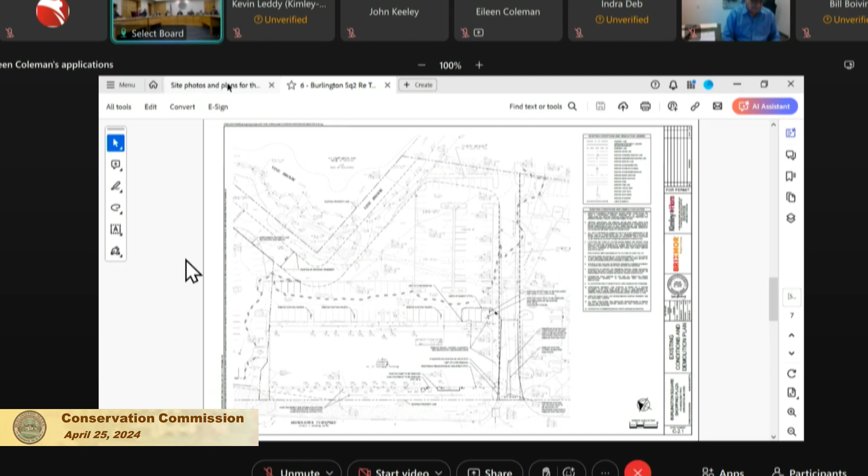Okay, John or Eileen, any comments, please? Okay, so this work is in the riverfront of the stream, the Vine Brook tributary that runs through the site. Right. So it's in the outer riparian. It's a fairly minor project, and it'll result in a slight decrease in impervious area in the riverfront area. So really, I have no concerns about this project as a request for determination.

Now, it's also been filed with the planning board as a minor engineering change. And I've talked to staff in the planning department, and they think they're going to hold off and issue a decision on the minor engineering change for this work until the parking lot work gets resolved. The parking lot is the subject of the notice of intent, which is also on the agenda tonight, but has been continued, because the parking is so critical to the tenants that this work is being done for.

The work being done under this determination is under a minor engineering change with the planning board. So they're going to hold off. They're probably not going to issue a minor engineering change. I don't have any concerns about issuing a negative determination at this point. But if anything changes with the planning board, it would require them to come back and file another request for determination if the plan changes as a result of any planning board changes.

Okay. All right, let's see, on the right, Ed, anything on this? Oh, nothing to add. I would concur with John on that one. All right, Sarah, anything, please? Could you explain how the reduction in impervious happens? I mean, I'm familiar with the site. I know Tower, old PR salon and all those shops along there. What's going to be changing? Sure. So the islands are currently impervious, so we're going to add landscaping to them. Okay. So that's how it's going to decrease the imperviousness. Okay.

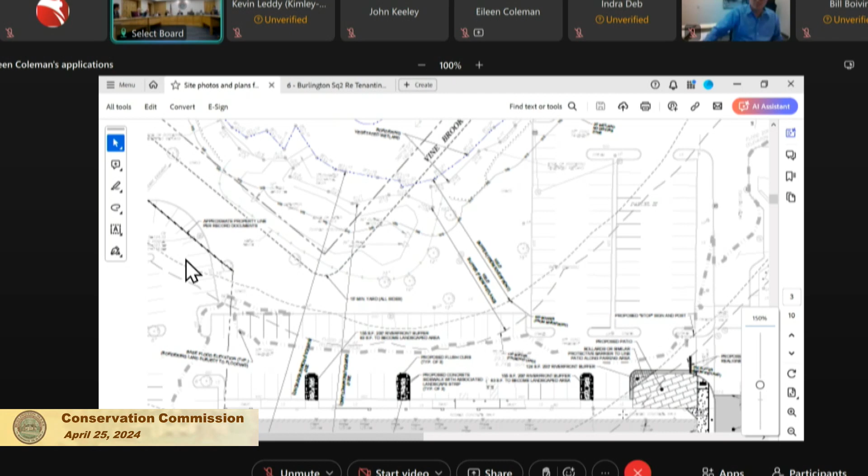And this does not concern anything regarding the flooded parking lot? No, that's a separate project. That's all I've got. Okay, on the left, Rob, anything on this? No. Okay, Indra, anything further? So will this enhancement impact anything when they come back with that parking lot elevations, the other one? Nothing. This shouldn't have any effect on that filing, no. All right, thank you. Not as far as the Conservation Commission goes.

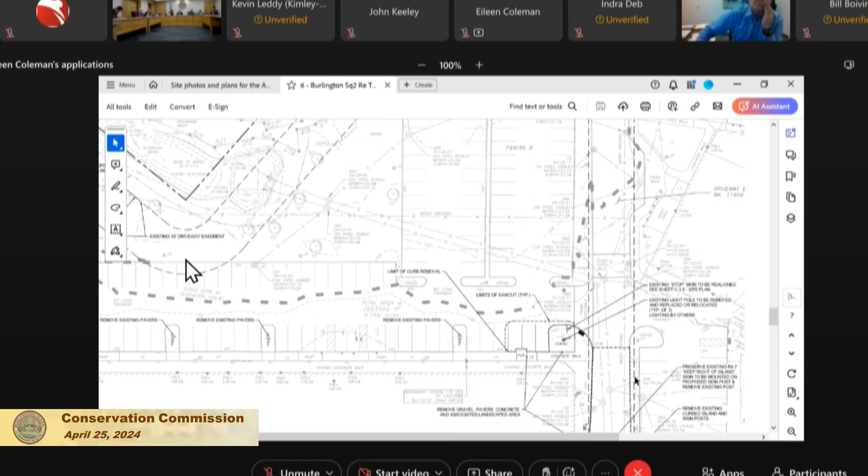Bill, anything? Yeah, there's one item on the drawing that I don't understand. It says 239 feet of a 15-foot tall screening wall. See the detail by the architect. I couldn't find the detail anywhere, and I don't know, is that a concrete wall, or what are we talking about there? Bottom of the drawing, those are the squares that are connected by a line. Down here? Yep. Not entirely sure. Pointing to this line to squares. 15? I mean, is that something substantial, or is that just a fence, or what is it?

May I, this is Marc Newman with Brixmor Property Group. Yes. How's everybody doing tonight? Good, how are you doing? Good, thank you. Kevin Leddy is on the phone as well, he's our engineer.

A couple of items, first of all, that screening wall, and I'll have Kevin describe it in a little more detail, is a screening wall that we're putting up along Middlesex Turnpike as part of what I would call a cosmetic enhancement to the property. It's part of our overall renovation of the property to make it look more appealing from Middlesex Turnpike. Along Middlesex Turnpike, the building has a lot of old HVAC units and other items along the road that are, in our opinion and many of the retailers we're working with, unattractive. This is basically designed to be a screening element.

It's already been granted a variance by the Zoning Board of Appeals, and it's going to have some signage attached to it as well. And it's obviously subject to the review of the planning board. That's pretty much the short description. What is it made out of? Yeah, is this a wall or is it a cyclone fence with the green webbing? Kevin, do you have any of the detail on the material that it's made from? I couldn't find an architect detail that describes it anyway. Oh, Kevin sounds like he might be.

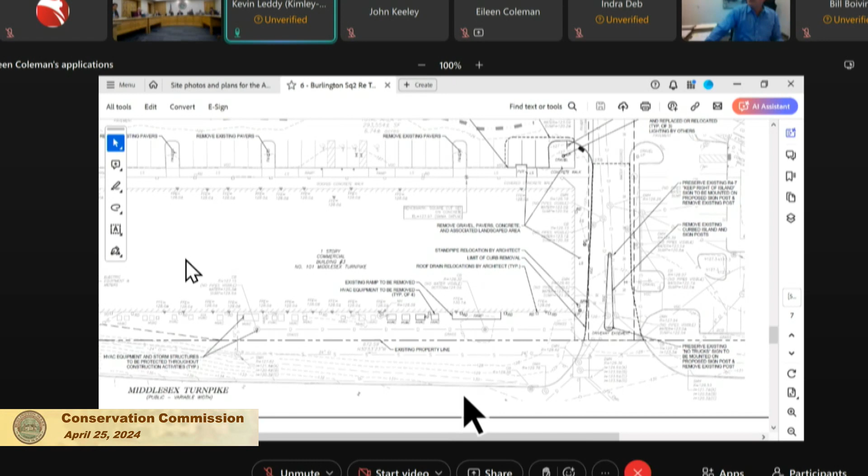This is Kevin Leddy with Kimley-Horn, one of the civil engineers with the applicant. The screen wall is located approximately 2 feet off the property line. We have gone before the Zoning Board of Appeals and received a variance to place it there. The screen wall is a mixture of living vegetation, sort of a mesh screen with some shiplap wood. I'm trying to pull up the detail on my end to share with the board. I think I have a fairly recent rendering I can possibly share. Yes, please. We have no concept.

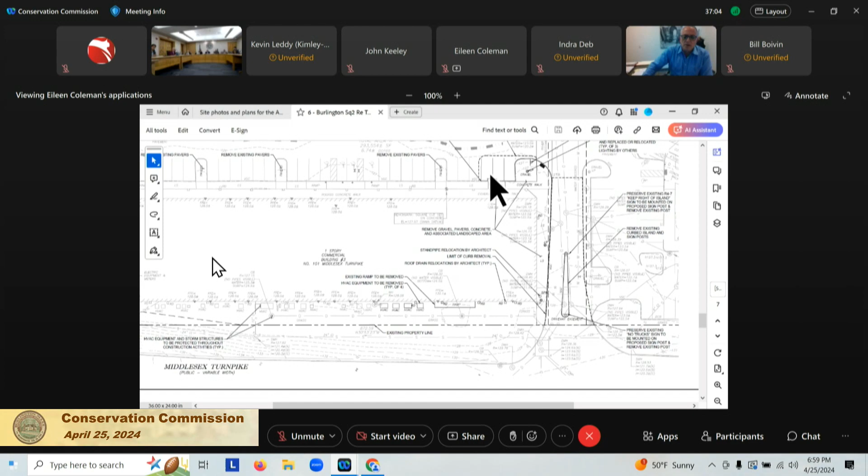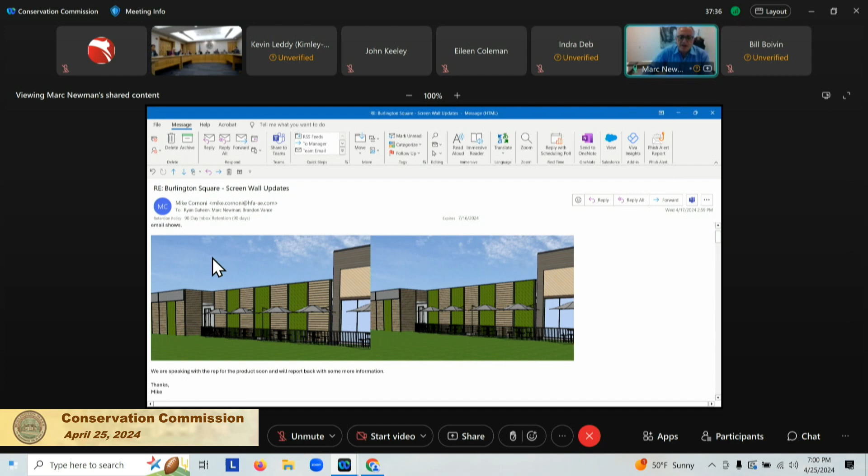Eileen, when you put up your window, it seems very small. Can you enlarge the window? I can't enlarge the window. I've tried to zoom in, but it's a window inside of a window, a feature of the big screen there. I'll zoom in as much as I can, but I've stopped sharing so that they can share. No, I understand. I didn't want to forget to ask. Just tell me to make it bigger whenever you want. Bear with me. I'm going to try to find something a little bit better. Hold on one second. Picture of it here, Larry. No, he just took it away. Gotta be quick, apparently. No, I'm gonna find a better version.

Well, it's well outside the 100-foot buffer zone for the riverfront area, so I am not sure we have to spend a lot of time on it. I was curious how substantial a construction it was. Oh, I understand the reason. Digging and all that. Yeah, I definitely understand the reason for the question. No, as soon as he shows us what it is, we may be satisfied.

This is sort of an earlier version, and I want to find one with more detail, but I feel like you would like to see this quickly. Hold on one second. I would think a natural vegetative screen would be very nice. Do you see this? What are we looking at? Yeah, that looks like a thing. This is essentially what the screen wall would look like. This is an earlier rendering. I think it's even nicer looking since this. We've improved the color. It doesn't have as many signs as you see here.

Why wouldn't you plant arborvitaes? They grow 15 to 20 feet, and it would screen all that stuff. Oh, I guess you want the signage up top. We also wanted to protect a sidewalk that we're creating that provides access to the new restaurant that we're proposing for this space, to where they would have their dumpsters, and it's really also to substitute out the signage that's on the building right now, just swapping out the signage along the building for this signage feature. It's going to be very sharp looking.

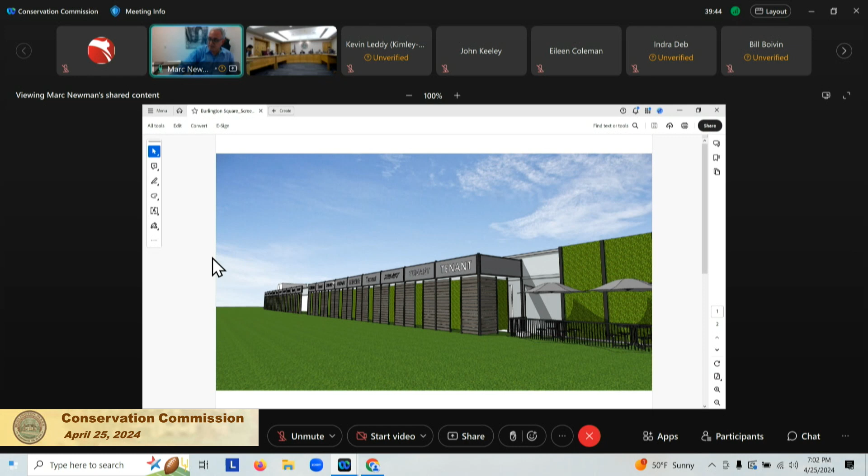And the sidewalk is inside this fence. Yes. Okay. Got it. Okay, well, we need to move along. Thank you for answering that question. If there's nothing further, I have one question. You have a patio that you're creating, is that true? Correct. Is there any reason why that could not be made out of pervious pavers of sorts? It's not a high-use area.

We can look into converting the material into porous pavers. Our initial concern with that is due to the high groundwater table in the vicinity, and hence the other project with the flood mitigation. We wouldn't want to commit to porous pavers and then have to backtrack that work should it be determined to be unfeasible with the actual conditions there. So why don't we just leave it that you have agreed to evaluate it? How's that? Yes, agree. Okay.

All right, if there's nothing further, we have a draft decision. So just logistically, I'd like to ask the applicant, do you want a negative determination of applicability this evening, or did you want to wait and see how you make out with the planning board? Go ahead, I'm sorry. Well, I think it's kind of a chicken and egg. I think they were waiting to get clearance from you that everything was okay. So they're actually waiting on the notice of intent for the parking lot, not so much for this. Yeah, we're fine moving forward with this.

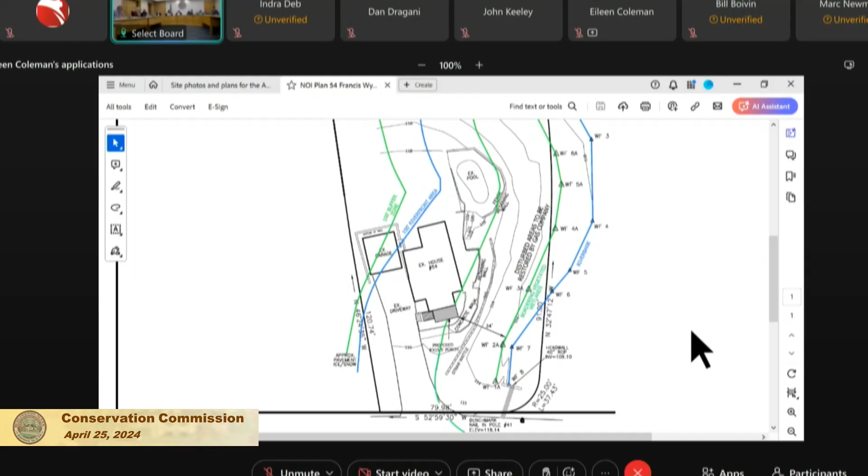It didn't actually go through us for a permit at that time because it was going to be in exactly the same footprint. But when it became apparent that they wanted to add a little bit to the footprint, that being the porch, we told them that they needed to do an application. Given the small scope of the build, we said it could be an RDA, even though it's actually quite close to the river. So the wetlands have been delineated out there a couple of times. We all went out and saw it 2 weeks ago.

There's wetland flags and stream flags, and I think that we're not in full agreement as to the extent of the wetland flagging. I think we also have a couple of questions about the stockpiling in the way back, about what plans there might be for those piles of soil. And we also understand that there was some disturbance pretty close to the wetland that was unfortunate, but isn't really a matter under this particular request for determination of applicability.

So I don't have an issue with the porch going where it is. I think we just have the question about the stockpiling, and we do have issues with the delineation. Did you want to add something? Yes, so it's an NOI, not an RDA. Sorry, it is an NOI. And it does require a waiver because it's in the 40-foot no-build.

But when the previous owner was looking to subdivide, I did walk the site with another wetland consultant, I won't name any names, but we determined that the wetland extended well into the lot, and that's what basically squashed the potential subdivision of this lot. Quite a bit of their lawn area is hydric soils, and they're currently driving through it. It's kind of torn up. And that's definitely a wetland area that they're driving through.

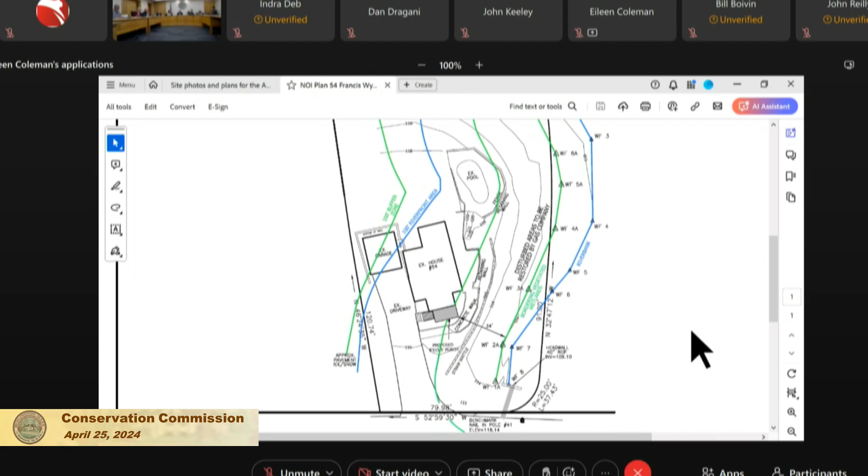Okay. That's about it. All right, so what essentially we have is a relatively small proposed project, but there are issues on the site. Right. Okay. Oh, and so we didn't mention this. So the newspaper screwed up. This should have been on the last agenda. The newspaper ad never ran. We sent them the ad and they didn't run it. So typically we extend hearings for two nights just to try to accommodate the applicant, because it's not his fault that the newspaper missed the ad, and we're actually opening the hearing beyond the 21-day period that we're supposed to statutorily open it in. I'd recommend that the commission try to wrap this up and issue an order in one night. Tonight. Right. Okay, so Ed, you want to say anything further on this one?

Just to follow what we all did see, in that it's clearly into wetland area, is there an intent to put any kind of a drive to get behind everything there? Because there isn't any other way to get back there. I mean, what is the reason with stockpiling that is back there? How do you get to it if we're showing that it's wetland that'd be ripped up every time?

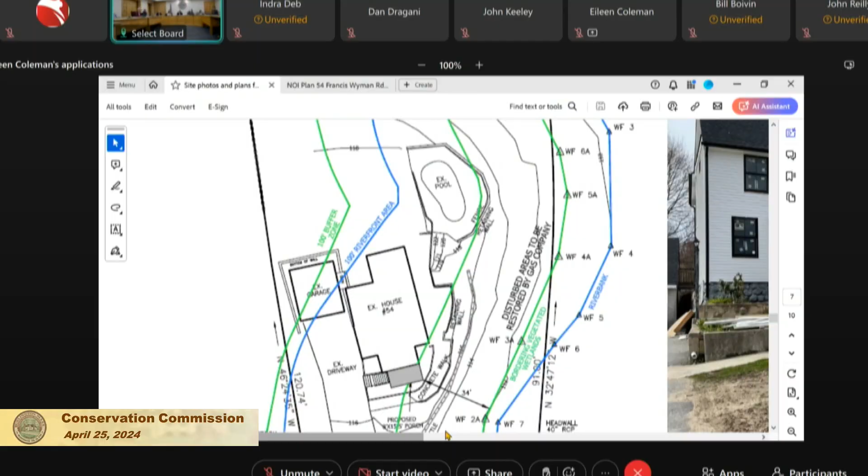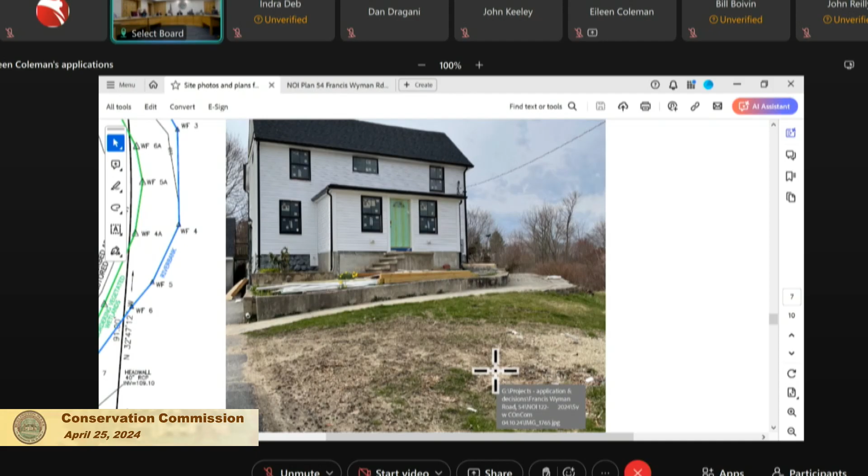So no, there's no intent to put anything on that side of the house. As far as the stockpiling goes, we didn't stockpile any of that dirt. It looks like it's been there a while. So we don't have any plans for that. We also didn't plan to get rid of it in any way. Certainly open to comments on that, but no, there are no plans currently for anything on that side of the house. Okay. Sarah? I don't have anything to add. All right. Rob, anything? No. Okay, Indra, please? Nothing. Nope.

Okay, Bill? I don't see any issue in issuing a variance for the small inclusion into what is now defined as the 40-foot no-build. And to echo what Ed said, it seems to me like there's going to be a strong motivation to have access to your barn out the back and stuff like that. And I don't know how you're going to do it. If that is truly wetland and a 20-foot do not disturb attached to it, it really closes that off completely. So I don't know if you have any comments on what your intentions are about the barn and the shed that's back there, and how you might deal, or even getting back there to mow the lawn.

I mean, here's the situation. I see the same thing, Bill. Yeah. Every time you drive back there, you're driving through things that are legitimately characterized as a wetland, even though it doesn't look that way, because of the nature of the soils, which is how it is defined. So I'm mindful of the fact that this is a very small project, and that mandating an expensive restoration and moving of the wetlands someplace else, but I'm wondering if we can get some kind of commitment from you, or you have any ideas on how to do something different, even if it's over a little longer term, to try to deal with the fact that you have an area that's wetlands.

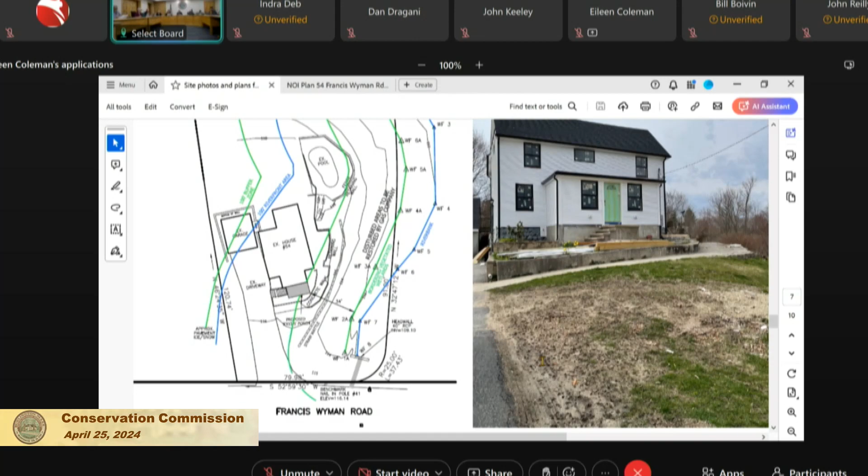John, what really needs to happen on something like this, ideally, is you prepare an area in the back that would compensate for that area that he wants to go through, and put a wetland seedling mix back there, and try to create a wetland back there? No? The project is an 8x15 farmer's porch. He's bought a house, the area's been treated as lawn for probably decades. He's not doing a major project. I would not recommend making him fill wetlands and replicate as part of a farmer's porch project. Because the project's too de minimis. Yeah, it's a very small project.

Do you have a problem with him driving his lawnmower over it after it's been leveled out again? It's been mowed historically. He's not just driving over it, he's mowing it. That's grass, and it has been grass for a long time. I just think the scale of the project, if it were a brand-new house, yeah, you generally get people to give back some of the 20-foot no disturb when somebody's doing a tear down, but it's a small project.

I hear you. And if we had been involved in this from the beginning, well, he had to build it in the same footprint. That's right. If this was total new construction, we would have asked for some kind of a design that would allow access to the back of it. Okay. Yeah, you're stuck with just the porch. All right. That's John's recommendation. Is everyone okay with that? Work with them when you're doing your plantings. Okay. Sarah? All right. So it looks like we've come to an agreement to move on.

He'll work with staff when he has to do his plantings, in a place further from where he drives his mower. I don't think he'd mind losing some of the lawn that's really wetland. He can let that go if it's moving 6 or 7 feet. Is there a gas line easement there, though? There's not, it's not a main, right? No, but there's the sewer main in the back that runs through the property. There's a sewer main that runs in the back. And that has an easement, yeah.

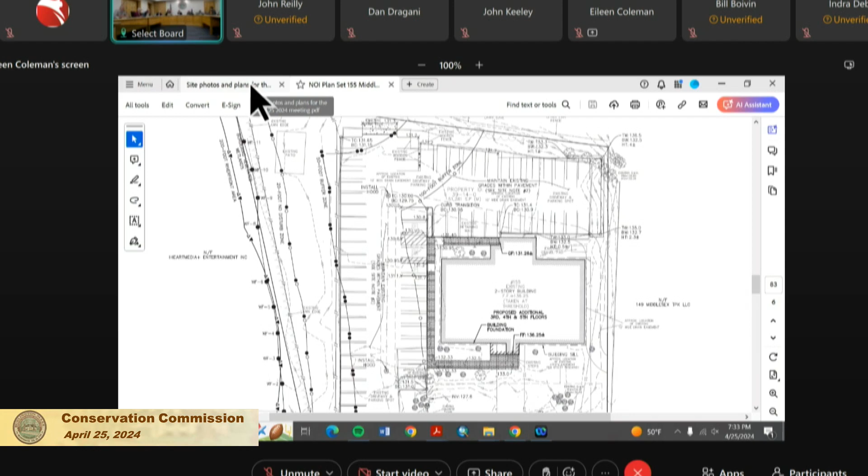I understand the commission went to the site. They had the opportunity to visit the site the other night, last night I think it was. And I think that's it. We'd be happy to go over any details. There's some photographs that we included in the notice of intent application. I'm sure Eileen probably has some queued up as well. But happy to turn it back over to the commission with any questions they may have.

All right, good. Thank you for that presentation. All right, so John or Eileen, do you want to give us a rundown, please? So as far as the resource area delineation goes, it seems fine. As Mr. Kirby said, the resource areas are off-site. They're not really accessible on private property and with an out-of-state owner, so it's pretty difficult to get in there. But the estimation of the BVW, just off the property line, pretty much. Seems right, seems fine. So my concerns are mostly about the stormwater on the site.

I have asked for some information on a few things. For number one, there's a big discrepancy on the FEMA floodplain maps and the elevations that are shown on this site plan. FEMA maps show quite a bit of some of the parking lot, and certainly a lot of that grassed area is 100-year floodplain, but the topo on the site plan doesn't match up. So just need some clarification on that, maybe some information from the land surveyor on what they used for a benchmark, and just verify that those elevations are actually correct. I don't think it would impact the project much, but I'd like to get that straightened out.

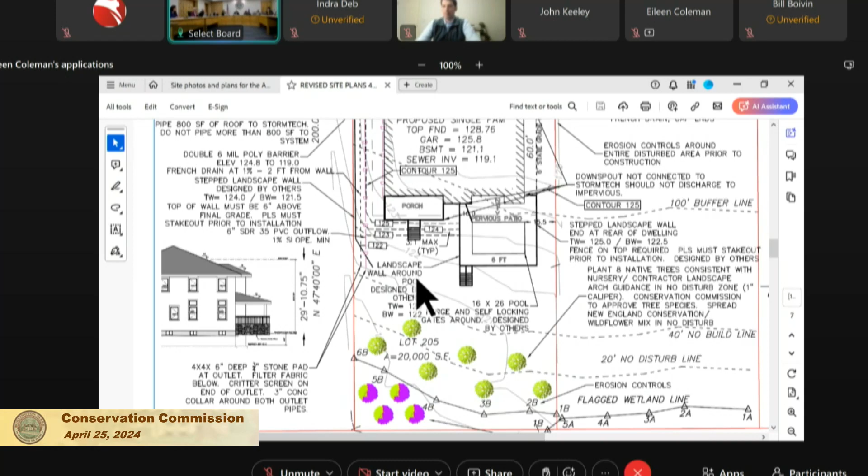Okay, so now that you've given a summary, I think what we should do is what we do with fairly complex projects: we list the issues, and then we'll get some responses back eventually on the process. All right, so with all that, John or Eileen, would one of you like to start a conversation about what concerns you may have?

Well, I will begin because I'm the one who was initially dealing with Rakesh and with Mr. Giuliani, and then with Maureen and with the neighbors initially, although I think everybody has been by now. So I just wanted to share a few pictures to add to what Larry said. These were the first ones we took when we went out and we saw that there had been cutting. There is a note from DEP in their portal saying that there are structures visible on the aerial. That's these structures here. There were I think three sheds in the area.

Were they gone when you first went out there some months ago? I believe they were gone. I think they were because they're not here in this picture. So DEP was concerned that these sheds weren't here, but they were definitely gone before the trees came down, as far as I know. Just giving you the history.

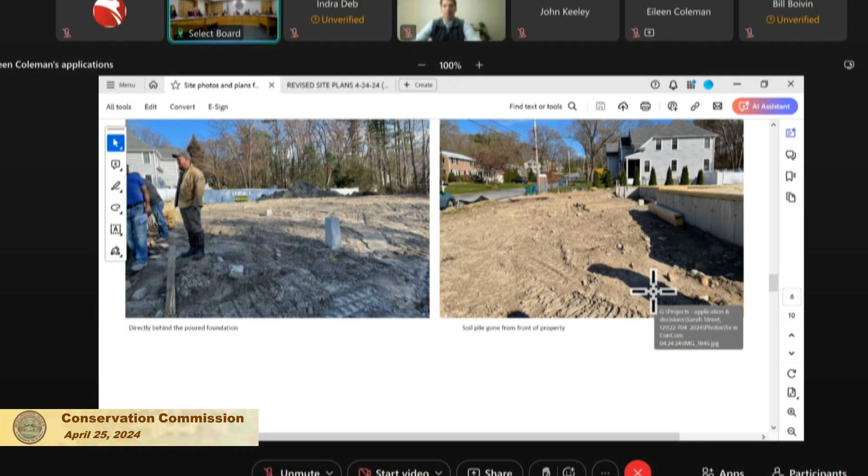Right. So he has also now put erosion control at the base of that pile so that hopefully there won't be any movement from that pile. And the pile at the front is now entirely gone. He did use some of the piles that were there to backfill the foundation. Everybody has been to the site at this point, and we're all fairly familiar, even through pictures, with what it looks like and what has occurred. So unless you have particular questions for me, I think Larry has made it all clear with his history, and Maureen has made it clear that they are very willing to do a much more extensive restoration in the buffer and the wetland.

All right, let's see where the commissioners are at, and let's list things as we go. Ed? I'm very concerned about the elevation itself, because it leads me to ask questions about this whole drainage area on the right. There's going to be a wall supposedly on the right side of the drainage, the stone that's there, and the top of the wall ultimately is going to be 6 inches above the landscaping that is expected. And I'm wondering how much water is really going to be going towards the neighbor based on the elevations that are there. There's just too much hill back there that says nothing but water's going to the right.

You're talking off to the side, you mean, Ed? Yes. Should I explain the stormwater management a bit better? Well, maybe the engineers should explain it. Yes, that would be a good thing. Probably would be better to explain that now. Why don't we take a moment and ask you, sir, to explain the stormwater management on the house first. Of course, my name is Dan Dragani from Dragani Engineering Group. Would you like me to share my screen to go through the plan? Sure. Absolutely.

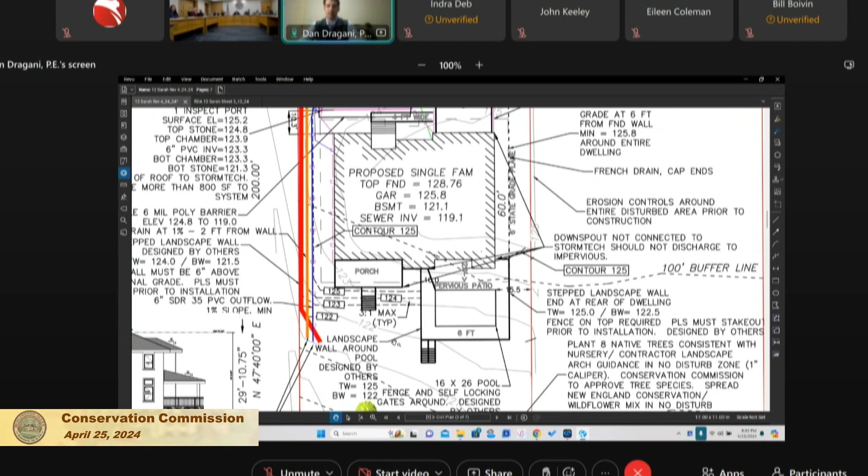That's since been moved to the other side of the home as a result of the revised delineation to be able to make sure that pool stays out of the 40-foot no build zone. And the applicant was also willing to install a pervious paver system around that pool to essentially additionally supply a more robust stormwater system that may be more amenable to the commission. So I think it's really a case where my client is just a little confused with the stormwater regulations, and they're willing to work with us.

They also first approached us, Maureen and myself, with additional plantings above 40 plantings. But the concern that Maureen and I had was that they may not thrive in that small of an area. And we may have ended in a situation where the plants are competing, which isn't really my specialty, but just wanted to mention that. The only additional wall proposed in this project is around the pool.

The reason for that is to elevate those pervious pavers to get above the estimated high seasonal groundwater table, and also to essentially have that pool so that it's not buried in the groundwater and we don't have any buoyancy issues there, where that pool over time, as that groundwater is rising seasonally, has any sort of issue in that regard. So that's about it for the design.

Okay. Come back to where I was on the wall itself on the left. Is there in that drainage area something that's carrying the water versus just seeping? Like a pipe, of that sort? Correct, yes. Yes, sir. There's a series of piping, 6-inch piping that runs right along the side of the home that will pick up the downspouts and dispense those to the stormwater system. So essentially that French drain is just an additional backup, belts and suspenders, I suppose.

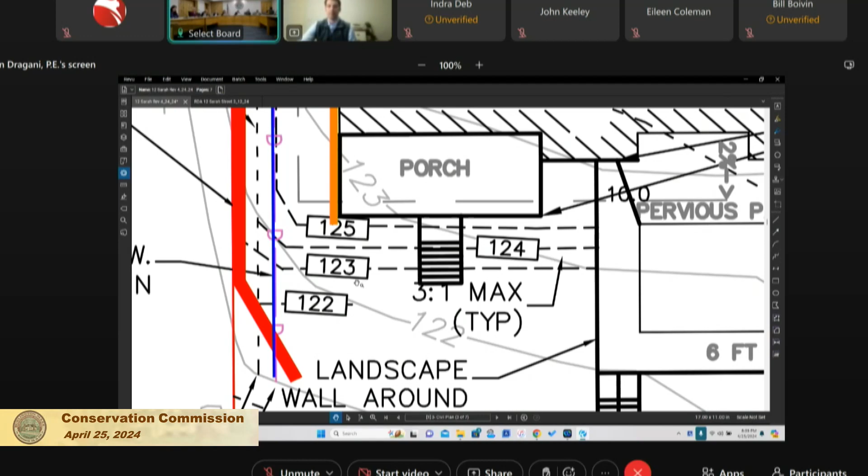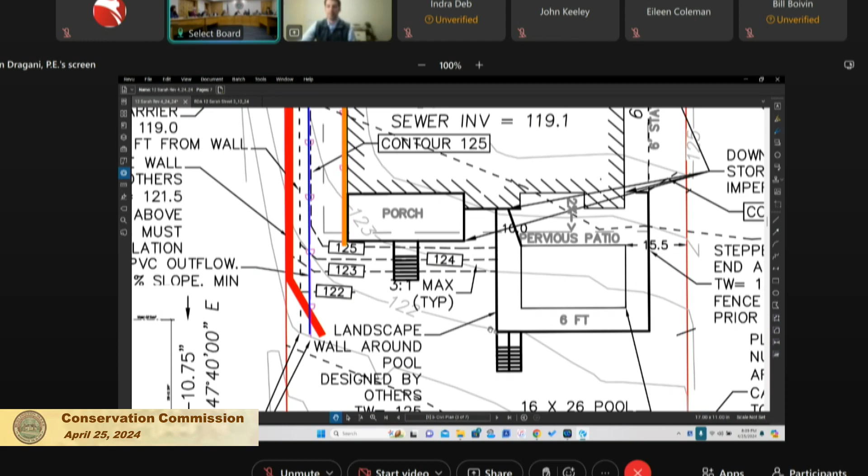Well, it does, because all the sort of darker lines, see right behind the porch where it says 125, 123? Those are the proposed, right? I see a 40-foot no-build line. He's showing it right there. Where it says 124, 123, 122, those are proposed, right? So the sort of paler lines where it's 122, just below that, that's existing. And that is also not changing, basically. Right. So further down on the drawing, those lines are going to go back to the original. That's what is shown on the plan, and that's what you intend to implement.

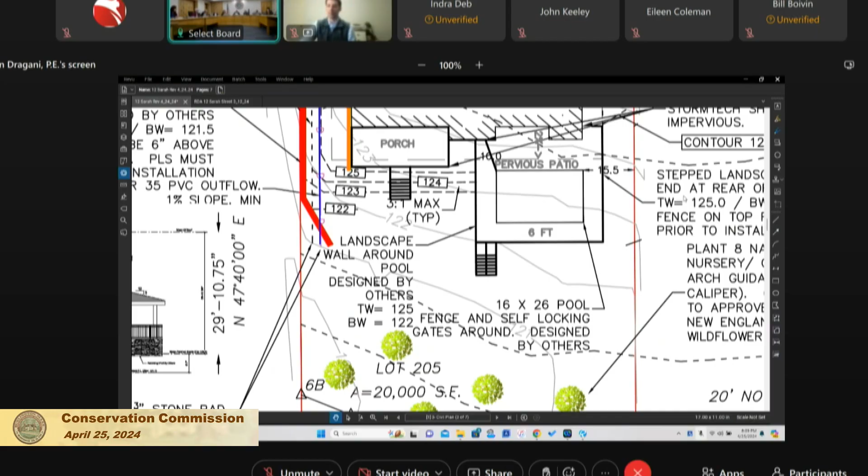Correct, sir. I would suspect, in my professional opinion, he just probably flattened out the pile so as not to have a stockpile there, because he was going to remove the stockpile. So is it correct to say that at the 40-foot no-build zone, as we're looking at the plan to the left, there's a 121 grade, and the site is going to be restored to meet that line? That is what the plan shows, and that is what I think should happen, yes. Well, is the engineer saying that? Well, he's the one, yes. This is his plan.

Okay. And how about the 122 grade? Is that going to be an as-finished grade, the one that's on the existing conditions plan? So he's showing that the proposed ties into the existing 122. Okay. All right. I see. But the only grade changes are going to be right around the house, from what I see. Right. Right around the main body of the house, because it had to be raised a little bit to get it out of the groundwater, which is what our current standards are, for the benefit of everybody in this town.

The bylaw we passed last year, so that builders can't build foundations in the water table, install sump pumps, and continuously discharge water from McMansions. You build them so that you don't need a sump pump, so you're not putting the house down into the water table and displacing all that water onto neighbors. So that's why the house is raised. But still, the whole house gets raised. It doesn't mean that the height is capped. The height is capped. They have to balance how high they can go, because it is capped. Yes, they're right at the zoning limitation.

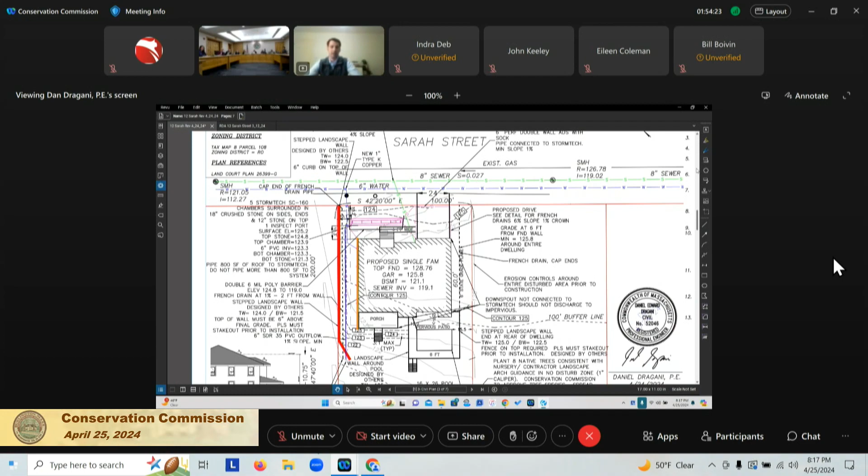Is that estimated groundwater elevation the same for the front test pit as the rear test pit? Yes, the measurements were slightly different because the ground surface was at a higher elevation. But compared to the existing conditions elevations, the estimated high seasonal groundwater was the exact same. So we were 28 inches down in the front lawn and 23 down in the rear yard. So it is very close to the existing surface. So you're saying that in the spring rains, the water level only goes up 1 foot from the wetlands line?

We found actual groundwater in the front test pit at 64 inches below grade, and the estimated seasonal high groundwater at 28 inches. It may be that the groundwater table goes lower than that. I'm not sure, it's just from the data observation. I can certainly look up that data. I believe it was last fall. No, what I'm commenting on is that estimated seasonally high groundwater level. You're saying it only rises during the wet season from a wetlands line at 120 up to 121. Is that what you're saying? It showed.

It's a 6-foot swing in the front. I don't know what that means. I'm trying to get an understanding of what your data showed. So the existing elevation, groundwater, so when we do a test pit, what we observe is... But the seasonal high is up there. Yeah, it says the seasonal high at 121.1. What they observed when they were there was down here, like 5 feet below that. I see. So it can actually rise up 5 feet, but the peak supposedly is 121.

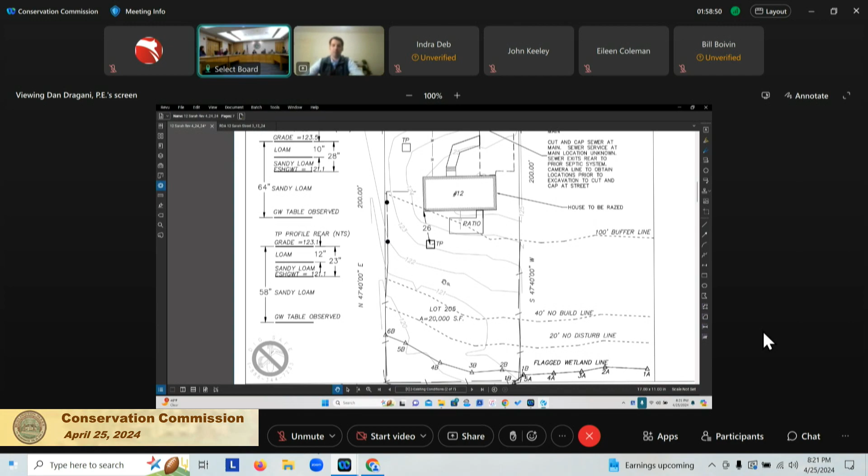I'm still a little concerned about the storm drain going down the left side of the property inside the wall. So there's 2 pipes going through there. One is the overflow from the storm tank, and the other one is what? It's just a French drain. So the French drain is capped at both ends, but the storm tank one discharges at the far end? Yes, correct.

And that discharge point is basically right at the 20-foot no disturb line from what I'm looking at. Is that correct? Just beyond the 40-foot. That's a little hard to see, I know there's a lot going on in this plan. Just beyond it, yeah, between the 40 and the 20 somewhere. Right there. And that discharge point is right next to the neighbor's property. Could that be extended further down so it actually goes into the wetlands? Is that allowed in the no disturb, an outlet pipe like that?

You could put it in the no disturb. I wouldn't take it all the way to the wetlands. Right, but you could also angle it more towards the center of the lot, away from the lot line. Yeah, I think that would make sense, to move that discharge point away from the neighbor's property in times when there is an overflow.

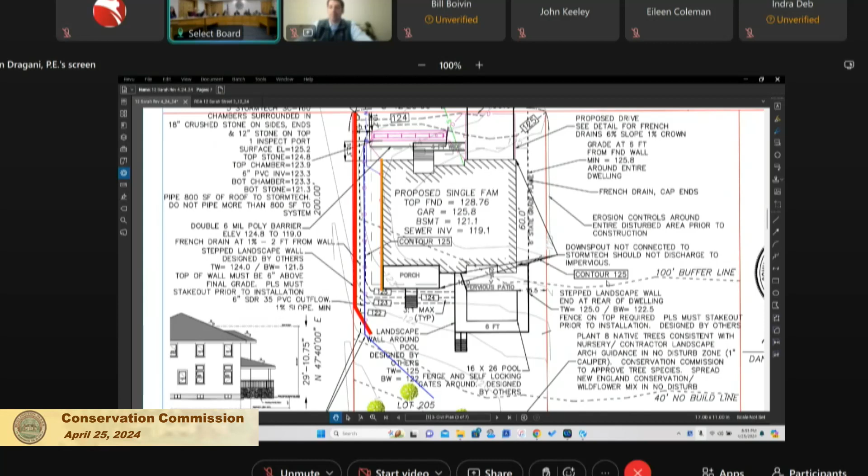Well, that's probably why they need to build a wall, because they're raising everything up. And the French drain along the wall is just going to bring more water to the back to go into the neighbors' yards. So that's kind of questionable as well. There's an overflow pipe that we're talking about here, and we're asking him to move it more towards the middle of his property, but we're not really saying how far. Is that going to go to the center of the property where the trees are going to be planted and can help grow those trees quicker? I'm not sure what the next step is with that.

I thought that was a great idea. Thank you for looking out for the neighbors on that, Mr. Boivin. I think a revised plan should show that detail, so we'll know exactly where it's going. They haven't drawn it yet, but they're going to. I mean, he's my neighbor. I want neighbors to get along, but to put water on your property line so it's somebody else's problem, I'm not saying he's doing it intentionally, but that's something that I'm kind of concerned about here.

That'll be helpful. And I'm not proposing he puts back a 3-foot diameter tree, but a 1-inch diameter or even 2-inch diameter tree to take up what was there, 8 huge, large trees. There's got to be a better way. I know, I went on the internet, you could get large trees and it costs a lot of money, but

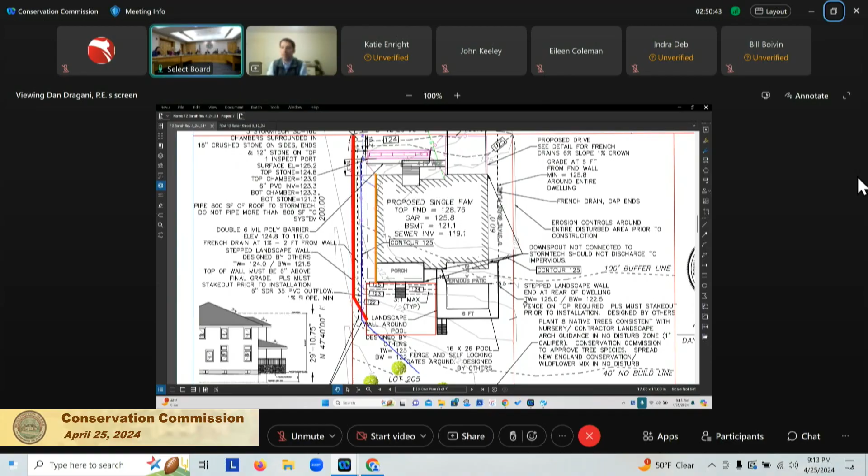All right, could I have a motion to continue the hearing for 12 Sarah Street, the notice of intent, until our next meeting of May 9th? May 9th. Is there a motion? So moved. Second? Second. All in favor?

Thank you all. Have a good evening, everyone. Thank you. You can continue. Thanks for coming in. Thank you, everyone. Thank you. Who's beside you? Same thing, Eddie. You're right, it's hard to find them. I mean, you know, I understand the concerns, but

Can you make a suggestion? Change that grading in the back, so we don't have the berm the way it is. Yes, that please. Yeah, he already agreed to that. He agreed to it. Okay. Right now, the plan shows it at the original grade level. And if the plan doesn't change, he's got to build it that way. Okay. Unless he comes in with a new plan showing a different elevation. All right.

All right, so next we have Kent Cottage, a continued public hearing, notice of intent, 225 Middlesex Turnpike, FK Partners LLC, to construct a multifamily residential development, DEP file number 122-702. I've been waiting a long time. I didn't even realize you were still, sorry, 225.

Hi, Kristen Labrie from Howard Stein Hudson. And Jay Finnegan's also here with me. All right, nice to see you. Would you like to say something before we start? I think we're good. I think if you guys have any questions or comments, we can start there. There was a site walk yesterday that I think everyone attended. And also, I noticed Katie Enright is also online. Yes, she is online. Hi, Katie. How you doing, guys?

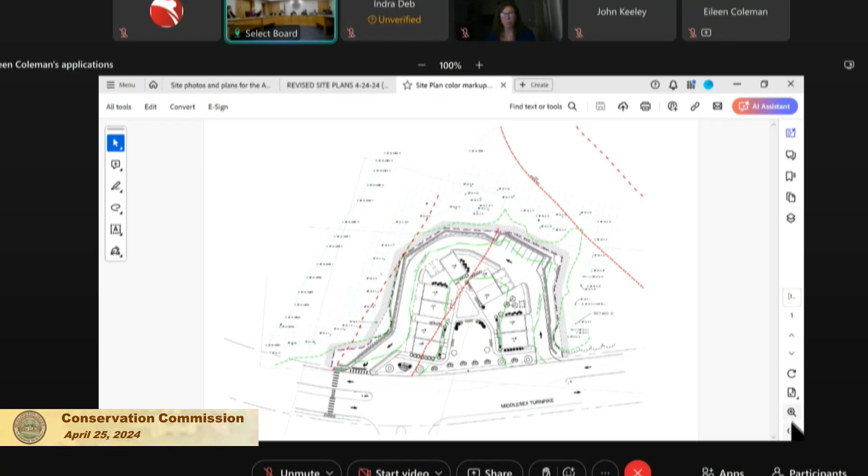All right, okay. So, John and Eileen, what is the position of this effort here? All right, so prior to the Conservation Commission site walk yesterday, Eileen and I walked the resource area delineation with the consultant from Oxbow, who's not here. So there's several resource areas on site, but there's the riverfront area, mean annual high water of two different streams, one unnamed tributary, which flows to the left of the site, and Vine Brook, which flows at the rear of the site. Additionally, there's bordering vegetated wetland.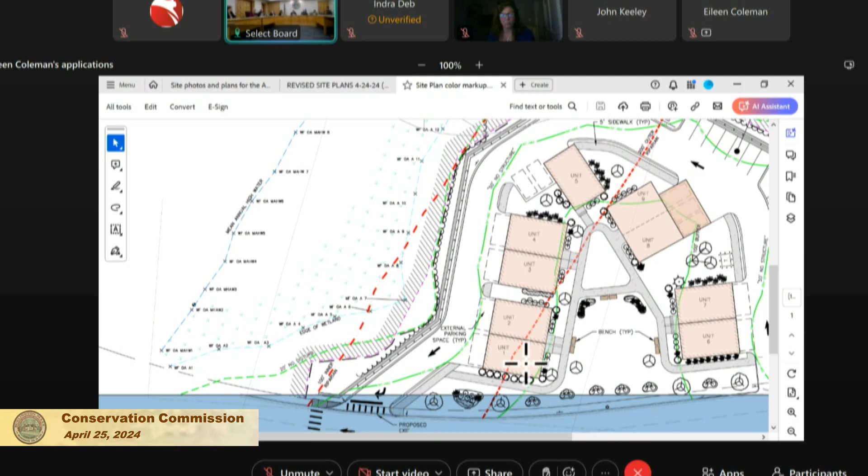And beyond that, there's also an isolated vegetated wetland to the right of their driveway. So we walked all that. We did tweak some of the wetland flags. The riverfront area flags, I had to think about, but at this point, I would say I agree with the riverfront flags. There was an area on the stream to the left, which is jurisdictional under our bylaw, but not the state until it actually exits the pond. So it goes into a pond and then comes out of the pond, and it's considered perennial there. So it's a bylaw stream.

And there was an area where I thought that the mean annual high water overtopped the bank. But I don't think it's a big deal, and it was just basically kind of an inundated wetland. I didn't see any flow in there, so I would say I agree with the flags for riverfront, and we did not agree totally for the bordering vegetated wetlands, and hopefully these guys have updated the plans. We updated those today, and we can submit those as conditional with the updated landscape plan as well.

Okay. Did that impact at all setbacks to no build or no disturb? The moving of A9 pushed in the no disturb a little bit, and I was able to adjust the.

My battery's dying. Oh, my God, sorry. So you better make yourself close.

Drama. I was able to adjust the erosion control line and the grading to be within the wall and the erosion control line, so it makes it a little bit tighter there, but it works. Okay, good.

That's it. So we did get information on the stormwater system from the New Jersey DEP or whatever it is, their agency that reviews the stormwater, and that looked good. Basically, all the other stormwater was pretty similar to a project that you had previously designed on the site, other than that tank.

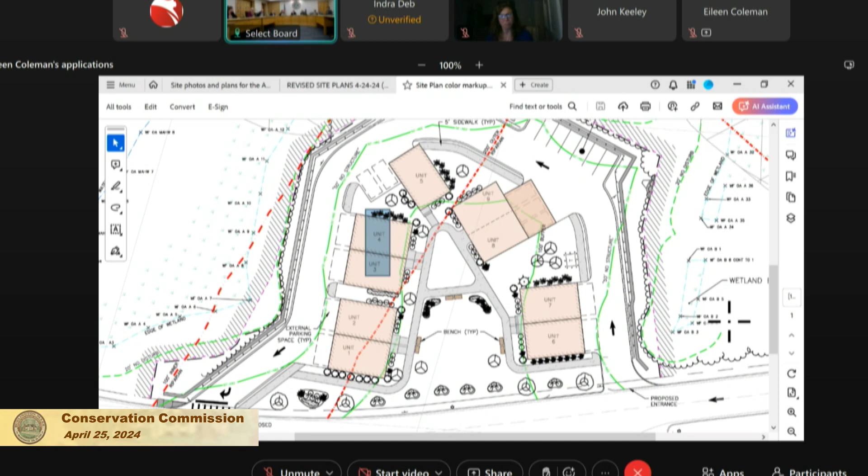The pervious pavers we did look at, given the grades, the stepping grades of the units, it'd be very difficult to install those, given just the grade change. And it'd also create different maintenance between the road and the driveways, and given the proximity of the driveways to each other and the road, it would probably create more of an issue than a solution. Okay. Is there other outstanding issues, John?

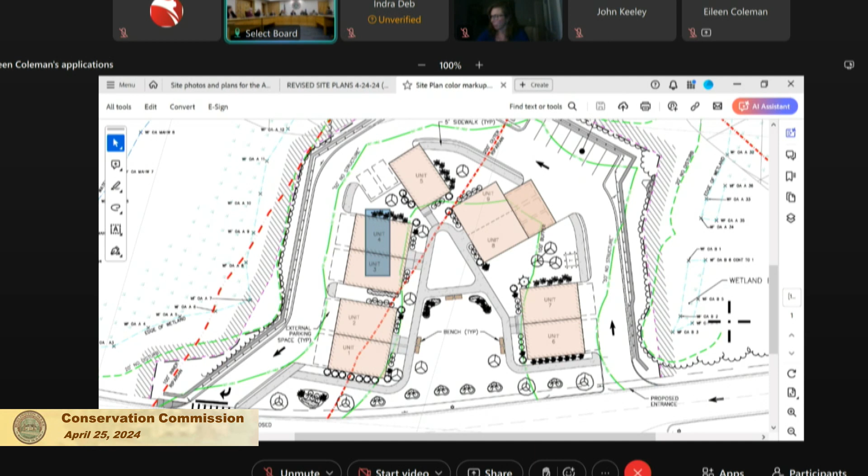I think that's it. Okay, the other thing that I talked about, other commissioners may have other things, but the conservation restriction is 23.5 acres. It is a large parcel of property. And I looked into, refreshed my memory on the conservation restriction, and one of the purposes that it was given and is labeled in the conservation restriction is public access trails for passive recreation, education, and nature study.

And then it goes on to say that the grantor gives the grantee the right to construct, maintain, repair, replace, and invite the public to use for purposes of passive recreation, education, and nature study, and public access trails. So Katie, are you still there? Katie? Yes. Yeah. I'm here. All right, so here's the thing.

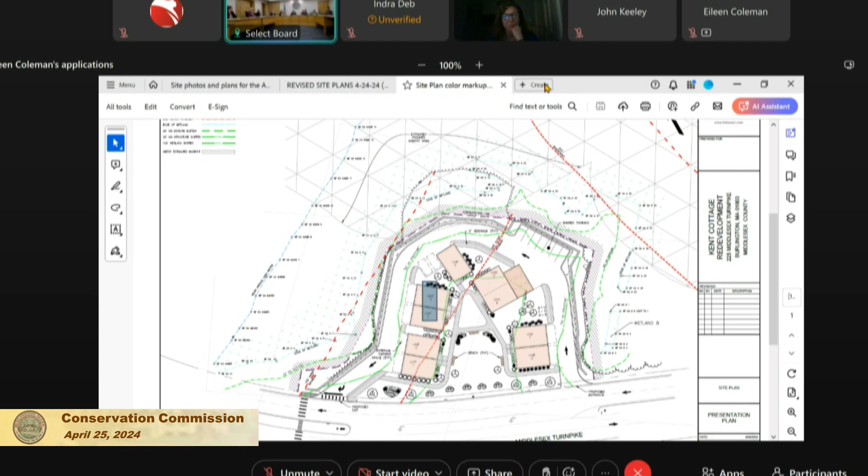We have talked extensively about a concept of having a walking path following Vine Brook. Most of it is relatively clear where it could possibly go, even though there's logistics to be worked out. But one of the things that is not clear is in this 23.5 acres, is there a way to go from near the intersection of Route 62 and Network Drive and wind its way through these 23 acres and end up somehow crossing where Vine Brook crosses the old Middlesex Turnpike? Or maybe that's not where it should go, I'm not sure.

But the point is that I would love to take the opportunity to at least ask. Nordblom is the current owner, is that correct, Katie? That's correct. So I'd love to take the opportunity to ask, is it possible that we could get just a concept line of where it would be best for a path to run through that area? Not asking for construction of a path, not asking for a design of the path, asking for somebody to take a look and help us decide how that 23.5 acres could be navigated with a walking path.

No, maybe it can't. So my question is, could you act as the intermediary and talk to Nordblom and ask if there's anything they could do to help flush that out for us at all? I can, yeah, that specific ask, I can certainly communicate that forward. I myself have not walked the entire 23.5 acres of the property. So I could not say myself, but I could certainly communicate that ask.